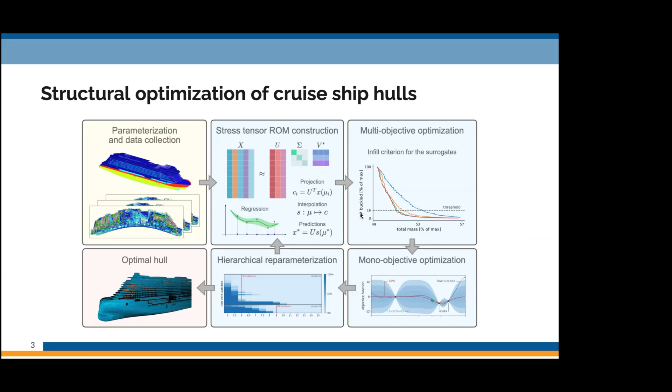sampling of the high-fidelity configuration to drive the model, the ship mass, to its minimum, and at this point we refine the problem formulation to achieve even better results. This constitutes a loop which streamlines the initial design phase.

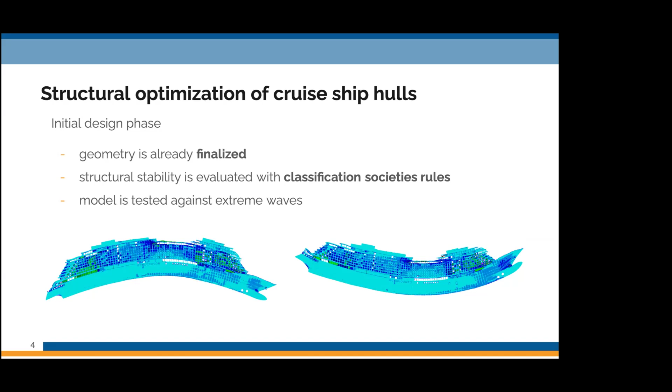In the initial design phase, the designers have already finalized the geometry of the ship, and they have to make sure that it is a stable structure. This is done by simulating it against extreme wave conditions and checking the result on the structure according to classification society rules, so basically insurance companies for ships.

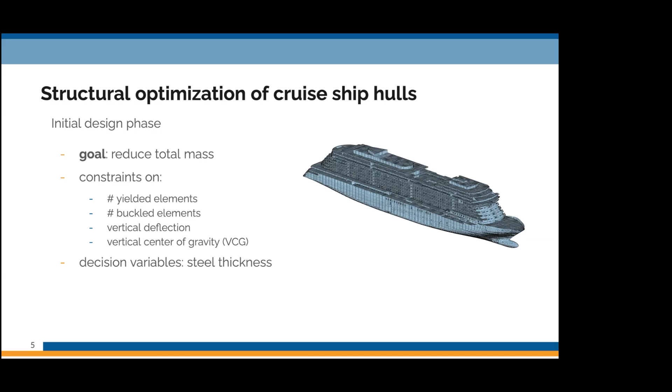The goal of the designer is to minimize the mass, while at the same time reducing the insurgence of failing phenomena of the steel, such as yielding and buckling. Also, the deformation of the ship is kept under control, so the vertical deflection. And finally, the barycenter of the model is constrained so that the ship doesn't capsize. The decision variables that the designer controls are the thickness of the steel plates composing the ship.

How do they do this? They basically divide the ship in its primary structural components. So the decks, the bulkheads, which are the longitudinal walls inside the ship, and the external shell, divided depending on the expectation of the structural work that's going to be done, and to each of these different elements, a different decision variable is assigned. So the thickness is controlled differently for the different components of the ship.

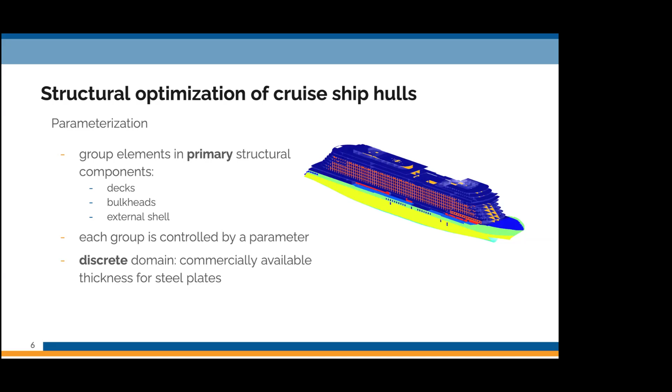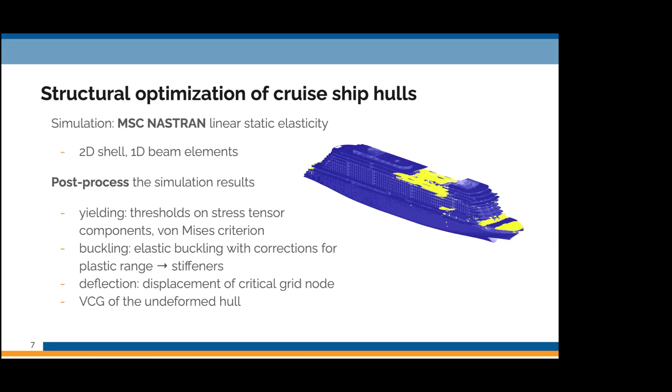The high-fidelity solutions are provided by MSC Nastran linear static elasticity, and the model which is studied is composed of 2D shells and 1D beam elements. The post-processing of the stress tensors of the elements gives the yielding and buckling of the different elements composing the ship. The displacement defines the deflection, while the VCG against the capsizing is in truth measured on the undeformed hull.

So while MSC Nastran implements adjoint-based optimization, it's pretty general. However, it does not support the particular buckling formulation which is required by the classification society. So we have to use black box optimization. And this, however, requires a many-query regime on the checking of different configurations. MSC Nastran is too slow even on an HPC cluster to do so.

We employ indeed reduced order modeling. However, MSC Nastran is a commercial software, closed source. We cannot use intrusive reduced order modeling, and thus data-driven reduced order modeling is required. For this, indeed, we use POD.

In this case, our input, the high fidelity configurations, is constituted by the stress tensor fields on the model elements. We split them by component, so the 3D stress tensor has 6 relevant components. We assemble a snapshot matrix of each, for example, sigma x, sigma y, and we decompose to obtain the basis, and the rest we throw away. The reduced coefficients of a particular snapshot of the stress tensor are obtained by projecting on the basis.

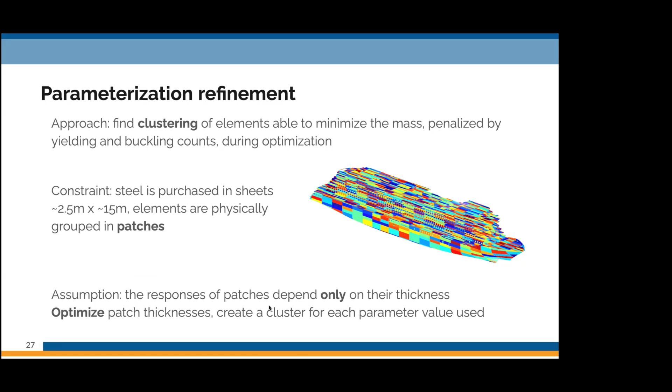This enables us to study the group of patches of each parameter separately, and if we are able to optimize the patches of a parameterized section to minimize the mass, the clustering will be given just by grouping the thickness of the patches. We use an integer linear program where x is the assignment of patch P to thickness T.

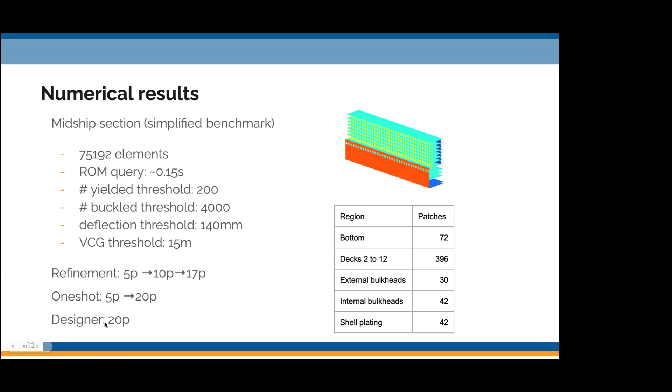So as for the results, we first used a simplified midship section. This is basically a quarter of the central part of a ship, 75,000 elements. The time for an online query is 0.15 seconds. We applied 3 different, let's say, threads of refinement. The first optimizes, doubles the number of parameters, optimizes, etc. The second one, in one shot, passes from the basic parameterization to the limit on parameters we put. And the final is actually a parameterization given by the human designers with the maximum number of parameters.

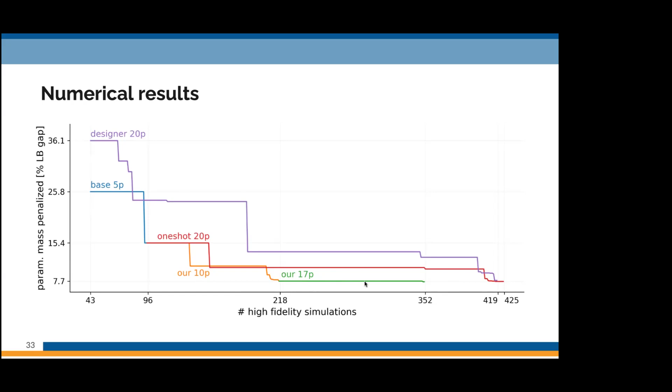And something to note, however, is that the constraint on buckled elements is the one that, let's say, is the most strict, but the one-shot parameterization still manages to come close to the best with a much lower number. So the designer has space to work in this optimum.

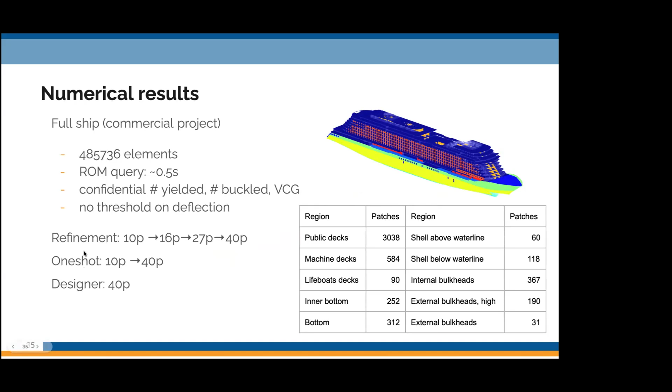We also tested on an actual commercial project. The ship is still being designed and has about 500,000 elements, and the online query is a half second. Well, the actual numbers are still confidential on yield and buckled elements, but we performed the same flow of optimization. In this case, the gains due to reparameterization are much less pronounced, but still the increment in hypervolume behind the hexadimensional Pareto frontier is conspicuous. And as the number of parameters grows, the gain presents diminishing returns as usual.

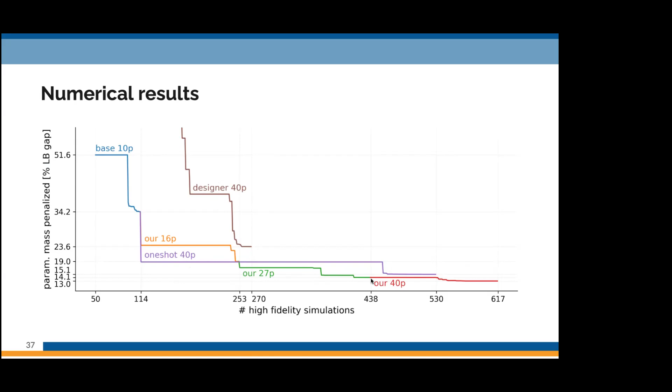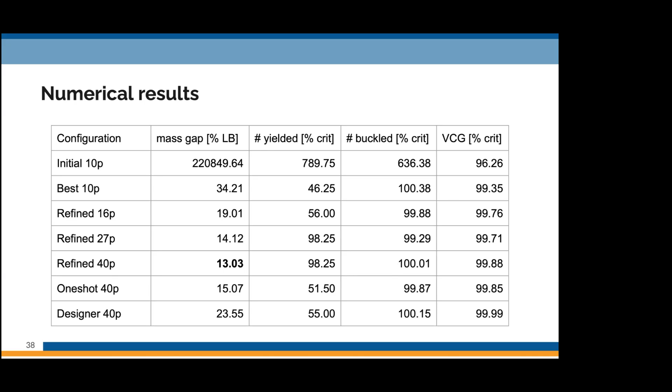In this case, the designer-provided parameterization, while being faster to optimize, is no match for the reparameterized configurations. And these are the final results. The 40 parameters of the incremental parameterization obtain the best mass. And here we can see, however, that the buckling constraint is exploited totally by all optima, and so it is acting as a bottleneck even for the one-shot parameterization.